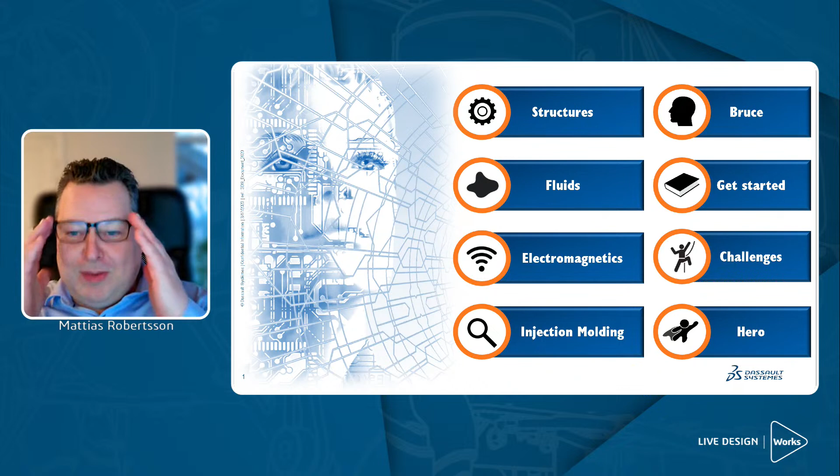Yeah, I mean, we have a lot of things we can discover and explore, but also, as you said, we really want to have some input from you guys in the chat. If there's any topic or engineering challenge you want us to address, we can explore that a bit more. So I'm prepared to talk about anything, basically, as long as my knowledge is there. As I said, I'm not a simulation specialist, but I'll see what I can do. My strength is probably structures and fluids.

Hey man, those animations that we see on LinkedIn say otherwise. Yeah, but that history is kind of being, and still is, my learning experience. I get really excited about some feature, I think, oh, this is really cool, and I just pop it out.

And it's not so much thought behind it. I think I get more concerned about how it looks and how to set up the video now. But in the beginning, it was just a cool feature, and then put it out there, and it got more exposed, and I was like, okay, I need to shape up the look for things.

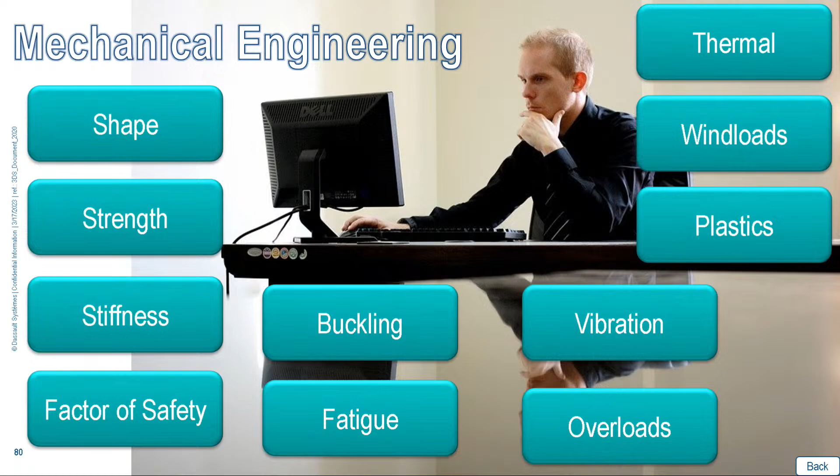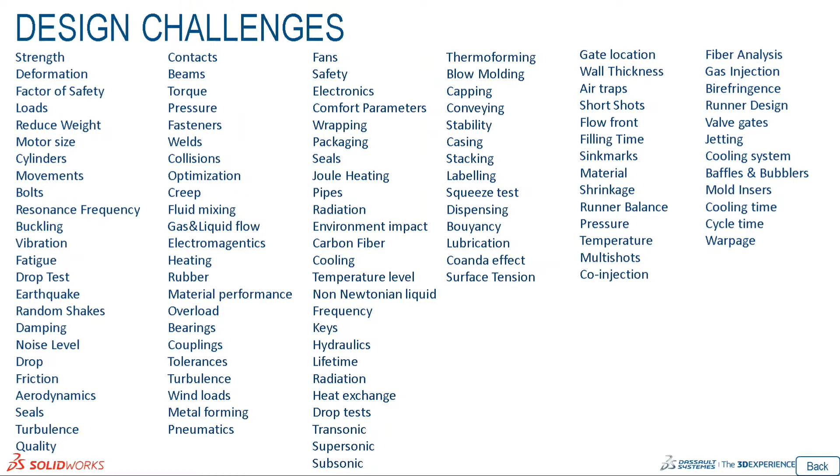Yeah, so there's a lot of challenges you can run into as an engineer, not just mechanical engineer. I think most of our SOLIDWORKS customers are in mechanical engineering in some way, and everything that comes close to mechanical engineering - it could be thermal, wind loads, fluids, vibration, anything. So just to emphasize how many engineering challenges we have that we can address with simulation, it's great. And I would say in the last 2-3 years we have more simulation products that can address even more challenges that we haven't been able to do before.

Right, and from what I'm looking at, Mattias, the design challenges are spread across the board. There are quite a lot of challenges that we run into when working on the product development process. I see some of these that I personally have run into quite a lot. So thanks for sharing.

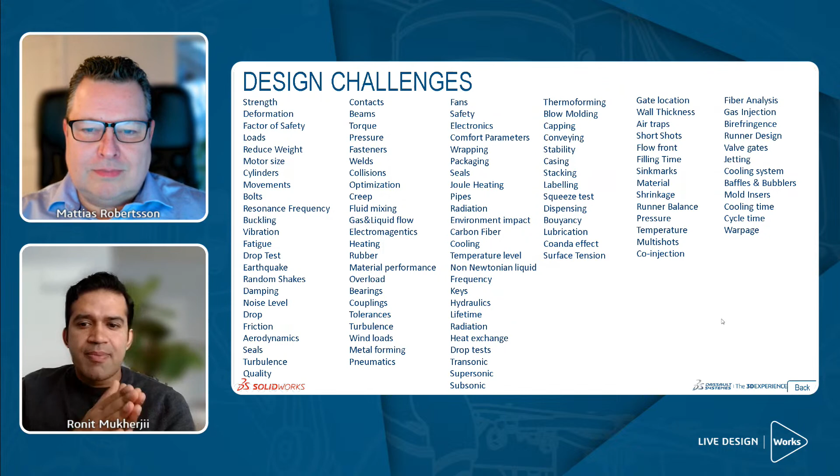And so let me ask you this. We've got design challenges, everyone has those. So where does simulation fit into these challenges? What's the value that simulation brings to our users and engineers and product development people? Yeah, I think that's a really good question, and it's often a question I ask companies - what really puts ourselves on, as the companies and the user side, what challenges you have and what drives your product development.

Not going into specific detail, but there's a lot of drivers where simulation is a key tool to use if you want to increase performance or make things stronger. If there's noise reduction needed, use the material in a correct way, or new innovative ideas, make things lighter, improve the quality. Are there any safety concerns? Is there any risk involved? Price and cost are always a driver. Even if you say we don't have any innovation or new products in line, what about your existing product? Can we lower the cost? What's the price of that? Can we look at alternative materials or manufacturing methods?

Sustainability is a big driver now in the simulation area, or I would say use simulation to address that. Right, it's always time to market. Yeah, right, sorry for interrupting. Especially with the whole world trying to go green, this new green initiative, that eco-friendly sustainability aspect from product development is incredibly important. So thank you for bringing that up.

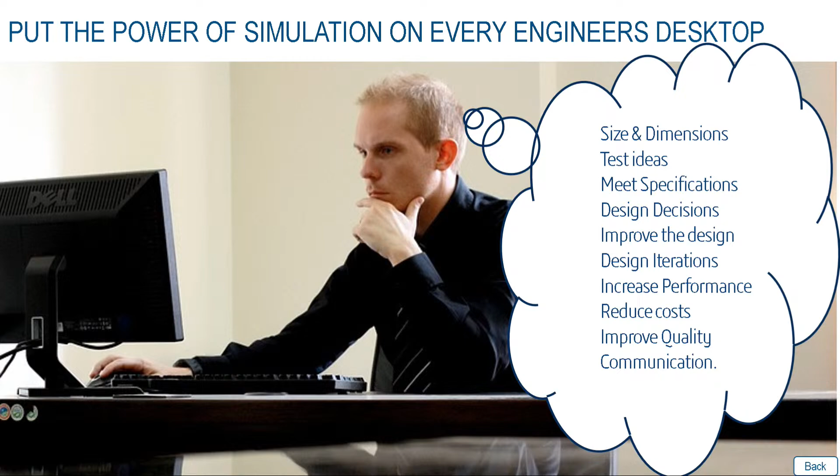Oh, that's fantastic. You bring up a lot of good points, and I have a question sticking in my mind. This tool, simulation - who should be using it? Should this be an early designer, a PhD level mechanical engineer, a master's level mechanical engineer, or your engineering manager? Who should be working with simulation at what stage of the design?

Yeah, that's a good point. We often see that it could be from the concept phase, when you try new ideas and be really creative, and I think everybody can use it. It's not complex, but the fear of simulation is doing something wrong.

Can you trust that you've done something right, and can you trust the results? So training is always important to get, and do that from a reseller. It's a constant process to tweak your design, set it up correctly, and to trust it.

So use it for concept design, and also for regular mechanical design when you're sizing and dimensioning, to see the result that you're doing the right thing. It kind of supports your gut feeling - as a mechanical engineer, I know if I make something thicker it will be stronger, stiffer, but how much? Where's the weakest point? So it's a guidance tool for product development in general.

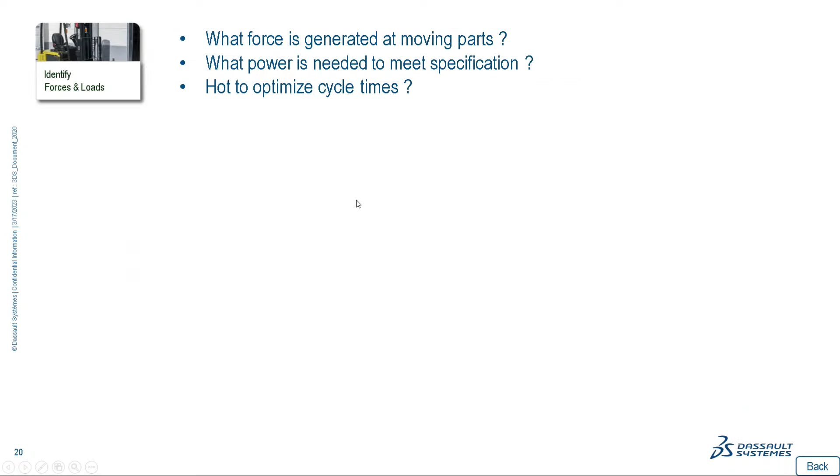Brilliant. So not talking about specific products, but in general, how we can use simulation to help us design products. Maybe if you want to identify forces and loads that occur in your design, we can use rigid body motion to help us understand and meet specification. What size of motor or cylinder do I need? How much force is needed if I need to do the lift in 1 second? So I get a quite good starting point of how I can use the values for my further design, or also test components - if I test this motor with this power, what is the effect? Do I meet my specification on that?

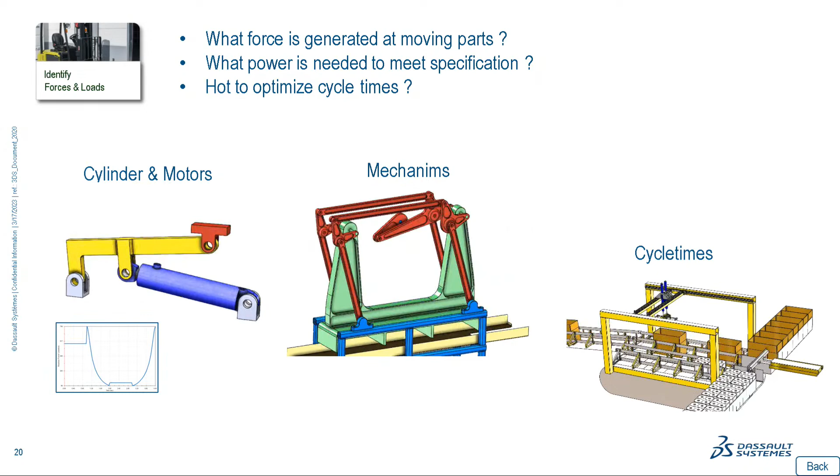So anything that moves in a mechanism generates forces, and those forces we need to take care of. We need to think about, is this good enough for my factor of safety? Maybe I have some fatigue problems at the end. So just to be aware of what is happening in my design and then optimize cycle times and so on. That's a little bit of rigid body motion there.

That's great. As soon as you've got some movement happening in your designs, you've got some dynamic loadings happening, and of course the forces and stresses that are produced with that, we want to know if your design is going to be working or not. So no, this is fantastic.

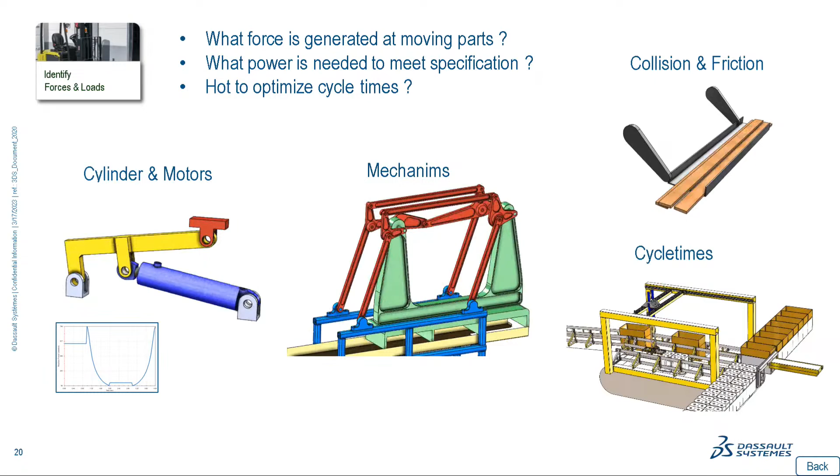So the moving parts and forces that are generated, that's a second leg of the simulation - sure, you can run your first study in a static scenario and see if things are working, but you don't know if it's going to be working on a dynamic side, correct? Yeah, and also I think this is the starting point of simulation, where you have created your 3D model in SolidWorks or some other program, but simulation brings it to life.

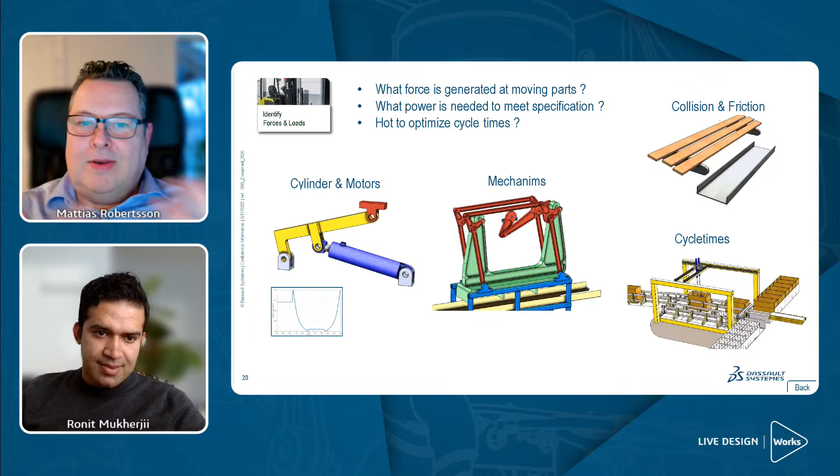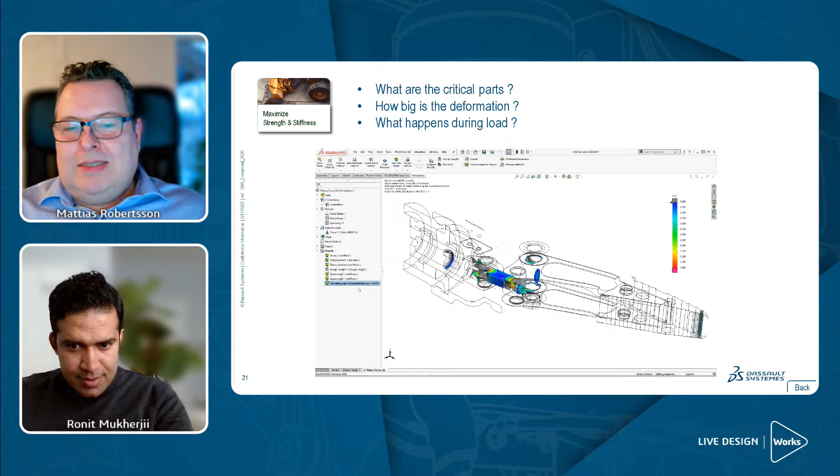Now we can add physics and really see what's happening, things starting to move, and generate the forces. But what happens inside the design if we want to look at stress levels, deformations, and so on? This is really the beauty of simulation, to go into your design and see what's happening.

How strong is it? Maybe we don't have strength as a parameter, but stiffness, and this really helps our gut feeling of what's happening here with the design.

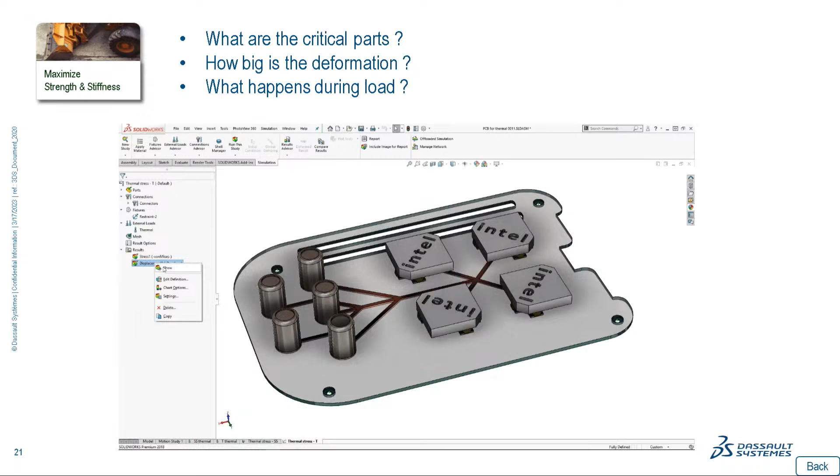So it's really adding the physics, but also thermal. If we have temperature changes, things start to move, and that could also be a factor we need to consider. There could be quite high forces on thermal loads as well there. So we can bring thermal loads.

You can run a thermal study in simulation and bring those thermal loads into our static study to understand how those thermal loads affect the design.

So for thermal loads, the physics are convection, conduction, and radiation, and often thermal is a fluid problem, because often we have gas or air that we cool or heat with, or some other liquid. So we have two different products for thermal loads, but I would actually recommend flow simulation for thermal loads. With flow simulation, we can capture the fluid movement if we have air or a gas or a fan that is cooling.

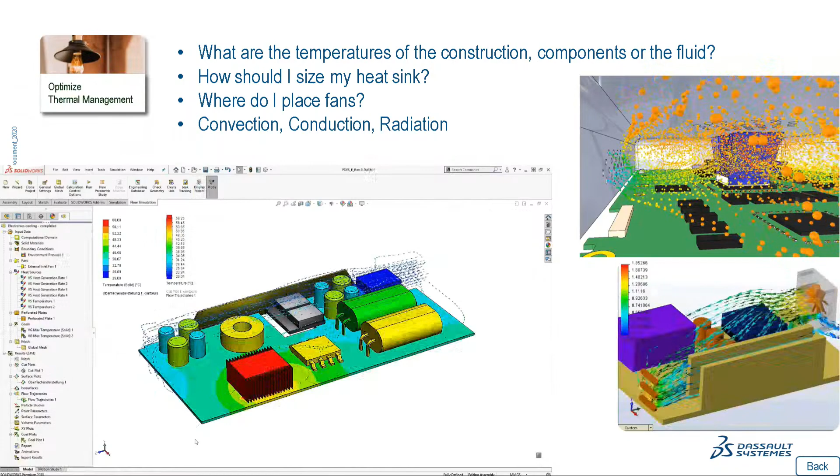So the output of this could be an input for structure. We kind of do this as a two-stage rocket. First, we do the thermal study to figure out what temperature we're going to end up with, and then we do a static study to see how this is deforming.

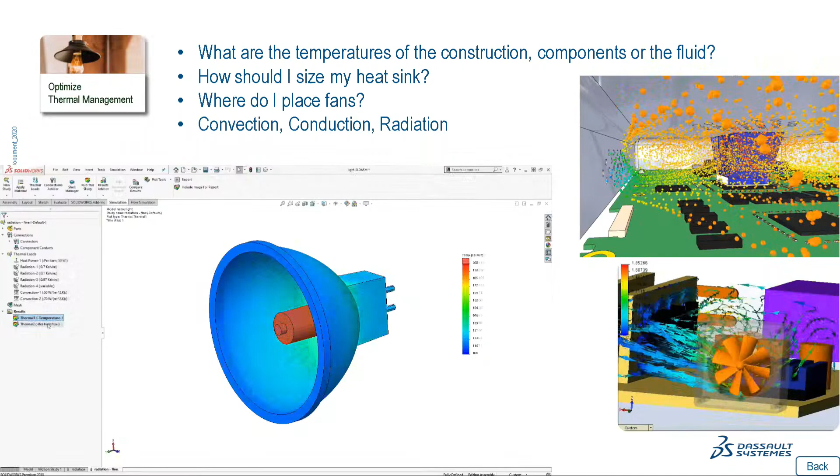That's brilliant. Of course, the effects of your thermal loads will affect the design itself, and of course, when things heat up, things melt. So we want to address those scenarios.

So this is fantastic. You mentioned that for these types of problems, for thermal studies, you would rather use the CFD rather than the thermal study provided in SOLIDWORKS simulation?

It depends on the application. I would say 95% of the time I will probably use flow simulation just to get more accuracy and easier setup. We can do thermal studies with conduction, convection, radiation with Simulation Pro and above, but flow is easier to set up and you get better results.

And also the air movement, the fluid movement is recognized here, because it could be the fluid that carries the energy, and it will influence the final outcome there also.

Right, and as I can see with the animation, it looks fantastically cool. I need to learn how to set that up.

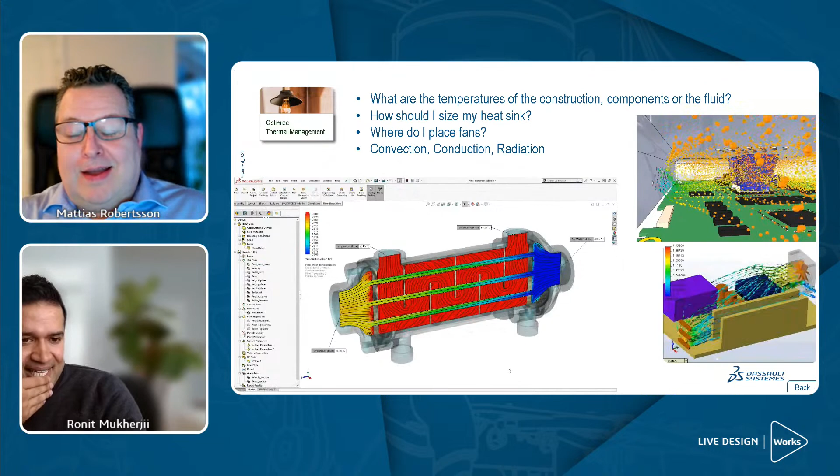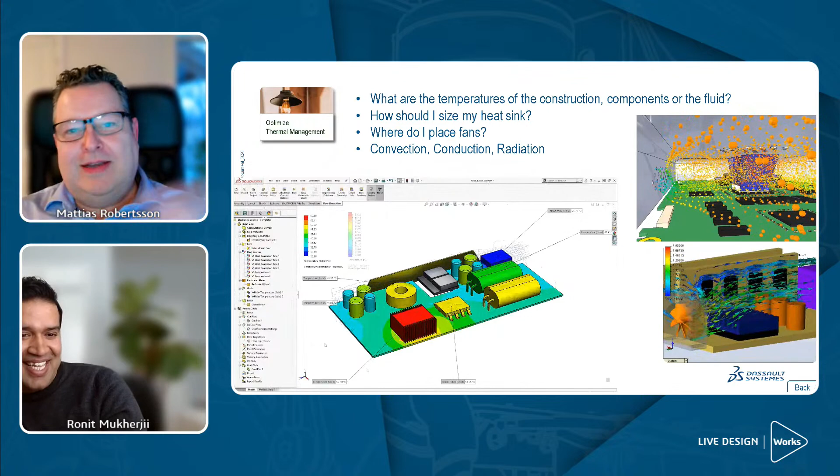And that's also what I want to highlight, that you can actually step inside your model. You can shrink yourself to 1 millimeter and really experience your design from inside and out. How much wouldn't you pay to shrink yourself like an Ant-Man and go inside your design to experience and see what it is, and then really see what's going on there.

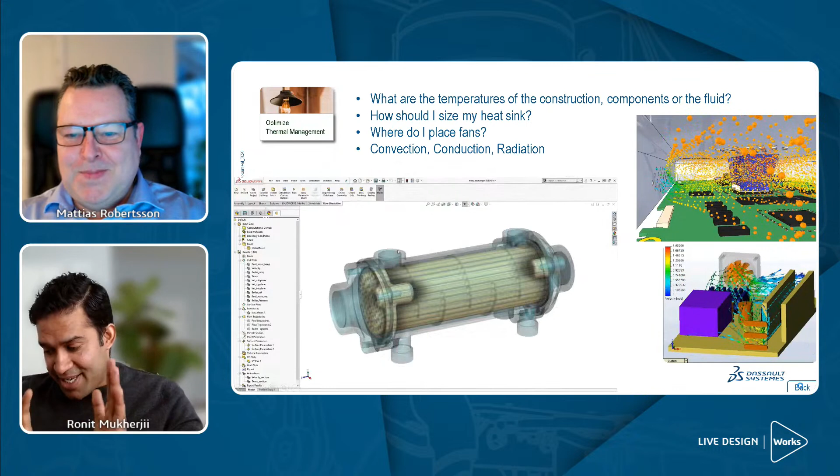You know, the first Xbox Microsoft did, they had to recall it. They called it the button of death or something, it turned red, and they had to recall and modify it. It cost them like $1 billion, because they had a thermal issue, it was not cool enough, and the electronics broke down for that. So temperature is a concern. They did not run simulation, I'm just kidding. But yes, somebody cheated in the development, and yes, that red light of death. I'm familiar with that, light of death, just because all my friends that had Xboxes dealt with it. I am a PlayStation guy, so...

We're cool. Oh no, this is fantastic. Thank you for showing us what structures stands for, what that role and that application stands for, what fluids are.

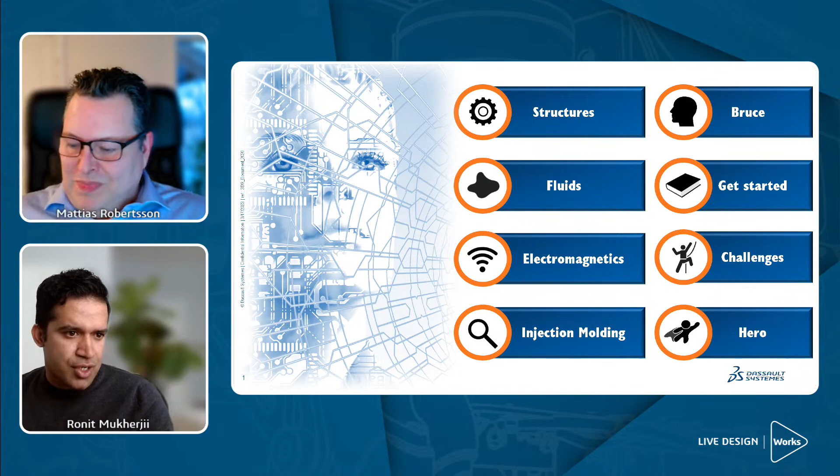Let's, I know we haven't touched on injection molding yet. Can you touch a little bit on injection molding, kind of tell us a little bit about it? Yeah, absolutely, so injection molding is quite interesting.

When I learn more and more about plastic, the more interested I became, because the decisions we make as a designer really influence how easy it is to be manufactured or not, regardless if you think it or not, because making a plastic tool, there are some things that we need to consider.

We cannot make things too thin, because then we can end up with short shots. We need to understand... sorry about that, technical issue.

So we need to make sure that it's okay to be manufactured. There could be problems with weld lines, where the flow meets, and that could cause visible problems and also weaknesses. There could be air traps, and these things are impossible to predict unless you have really good experience from other failures and successes, how to meet those.

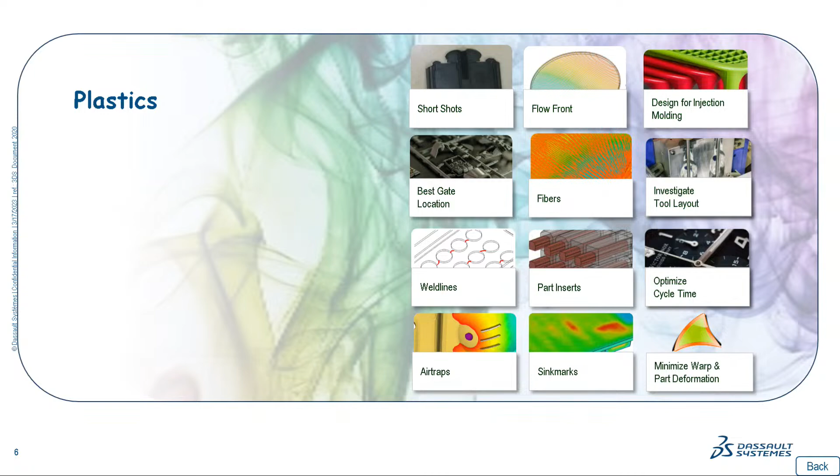So what I'm seeing on your screen, Mattias, I see, like you say, weld lines, air traps, sink marks, and short shots. These are just issues we see on plastic products. If we don't have 30 years of experience in plastic products, and gone through 30 years of failures trying to understand how this works, we can overcome that with the simulation tool that we have, and at least know where these issues are going to happen.

So we can, for example, change our gate location, and that will change where the weld lines are created, where the air traps show up. This is fantastic. And there was another point you brought up, that rework on molds is costly and lengthy.

So when you think about it, another point you brought up is the thickness of materials, the plastic materials and stuff. When you have to do rework on a mold, either you're removing material from the mold, or sometimes you have to add material to the mold. So those things can be tremendous.

And I think you bring something up that I wanted to mention, the thickness. The trend in the plastic industry, or parts in general, is that they get thinner and thinner. As a mold maker, you have guidelines not to go thinner than a certain thickness for a given material, but we're kind of pushing that limit. Looking at the shells on mobile telephones, they are super thin, and we need to make sure you can do that part, because doing a thin plastic part, that's the challenge.

But that also comes with the sustainability aspect, that you want to make things thinner, you want to use less material. So how far do you want to push that with your experience? Well, now we can simulate that and make sure it's working.

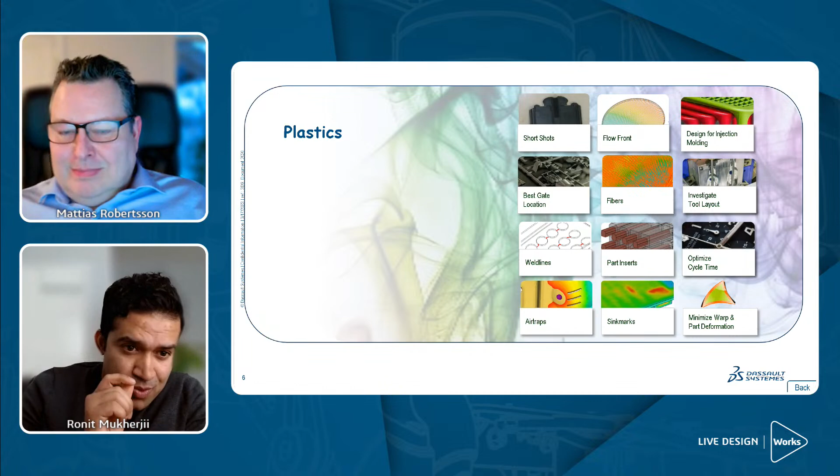That's a great point. And that actually leads to another question we have in our chat, and it's a fantastic question from the point you just brought up, how far we can go with this. So the question Maurice has is, how about our future expectations?

Will we be seeing AI influence in simulation, or have you seen something so far? What do you have to say to our viewer Maurice?

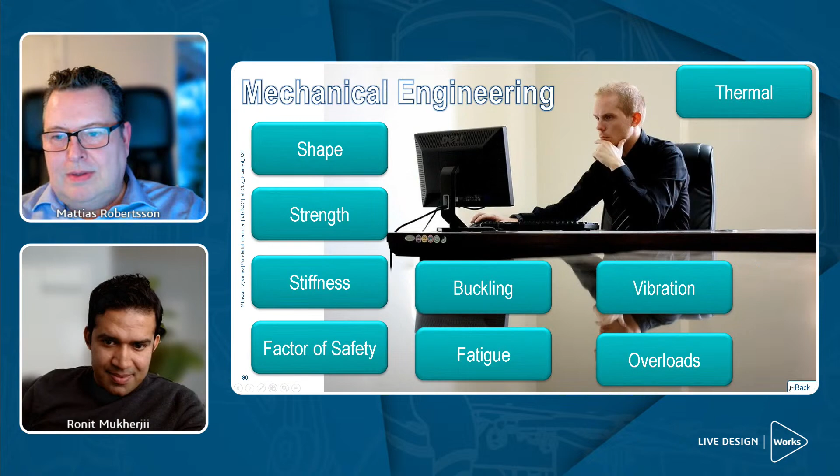Yeah, that's a good point. Let me find my slide about that. There we go. I think that's really interesting about the history and future of simulation, because in the past, if you go back 20, 30 years, it was so hard to use, complex, expensive, and targeted for specialists.

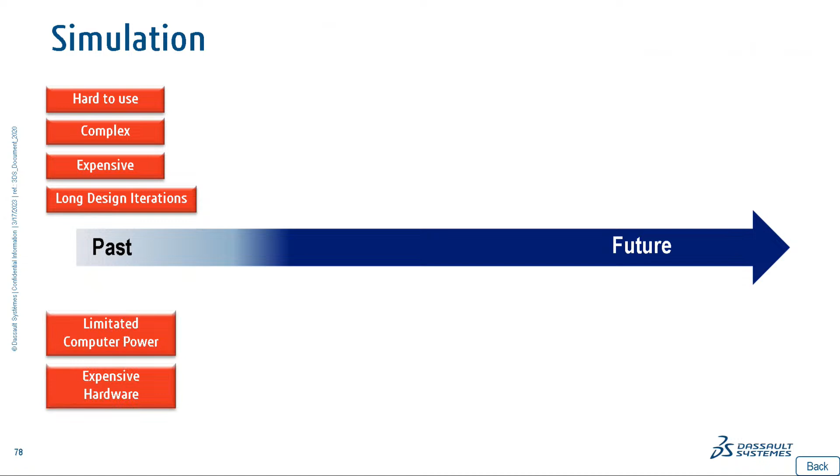And the hardware was expensive. I think today we've gone a long journey with simulation, where it's powerful, easy to use, fast. We have integration in SOLIDWORKS, and it's really cost effective in product development. Today we have access to cloud computing, a lot of cores included with the license, and we have GPU computing.

What's going to happen in the future? Well, I think we'll get more AI and machine learning. We can also see that, and they will probably take a long time in certain issues, but we can do certification with simulation results, so we don't need to go to the lab, make a physical test, and break it to get certified.

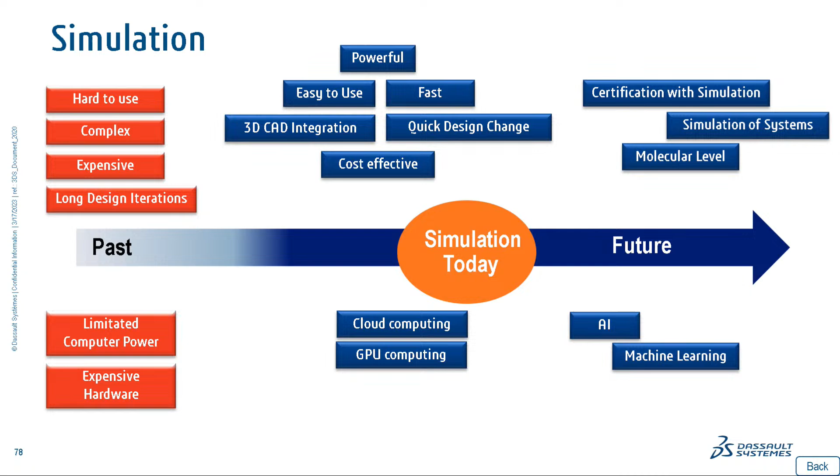If the industries accept more and more simulation, that's a fantastic point. Yeah, and I think some parts in the aerospace industry, you can get certified by showing simulation results. I'm not familiar with that, but I heard it's coming.

So I think that's also interesting in the future, that we can accept more virtual tests and trusted results, and also do even finer simulation. We'll probably have more computing power in the future, get even faster results, and also do simulation on a granular, maybe molecular level, getting even more details. It's going to be bigger problems, but we can do it even finer, I think.

I was just about to mention, getting into the molecular level is going to open another set of problems which we'll address and get there. But no, this is a fantastic roadmap you're showing, and you've kind of nailed it.

Like in the past, it was extremely hard to use, and I still remember my uncle who was an engineer, he used to do hand calculations and stuff, and I was like, hey man, what are you working on? And he's like, oh, this is what we do and all that stuff. And of course I was like, I don't want to do this. But things have come a long way. As of today, like you mentioned, much easier to use, lots of power.

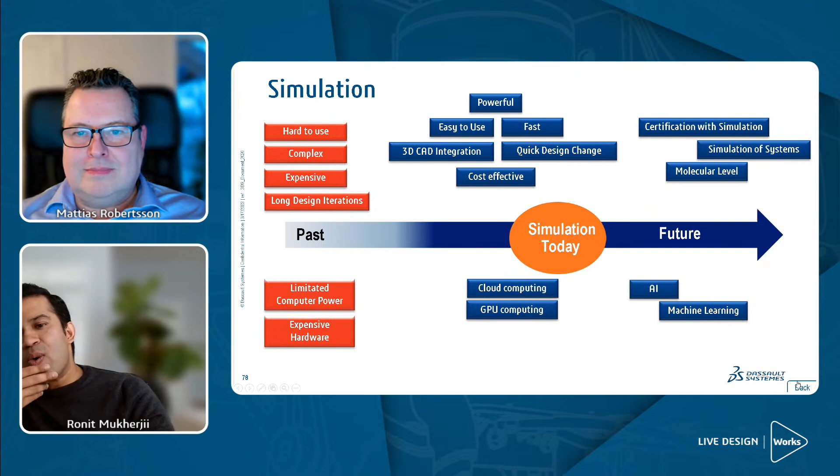Yeah, Mattias, I know that I am super excited for this. So I know you have some cool videos and animations to show us, and of course introduce the superhero Bruce.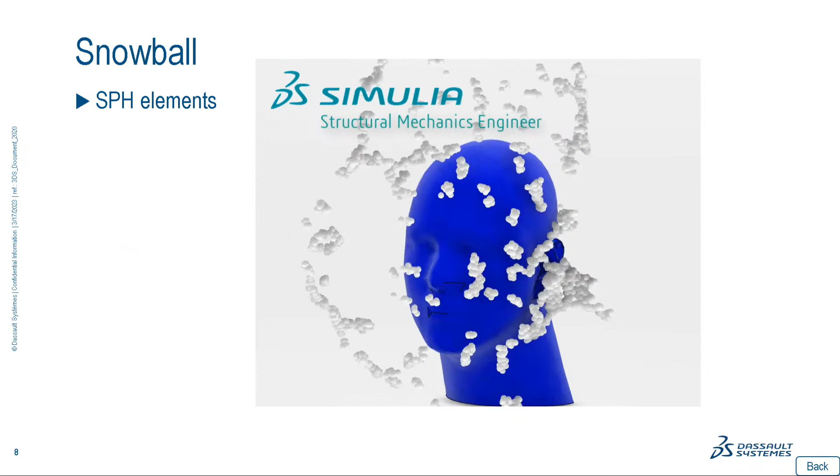So one of my first videos was with the SPH elements. That's something we have in our structural mechanics engineer role. It's kind of liquid, and it has some forces between those particles. These are quite big particles, you can see this kind of a snowball. I thought, let's move this to a test dummy and make him blue. I like blue man group, so I wanted to incorporate the blue stuff there.

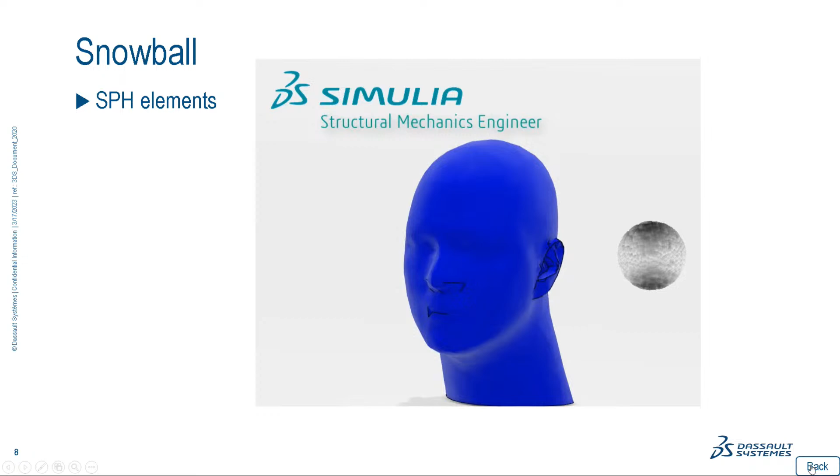So I can show you a little bit so that's where Bruce came from. Okay. Yes. All right. That's good to know.

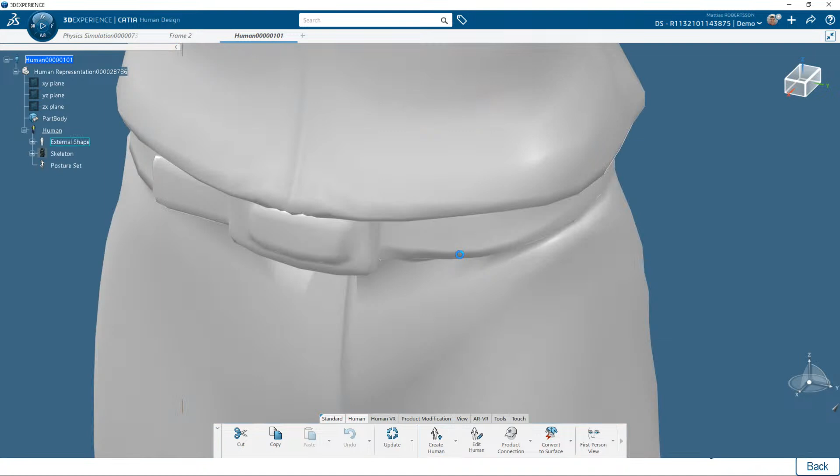So I can show you how Bruce is created. Now I have just the face of Bruce, but Bruce is created from something called Visual Experience Designer. And there's something called the human design here. So here we have a lot of different characters, man, female, and I picked this guy as Bruce. So it is very, very detailed what you can do.

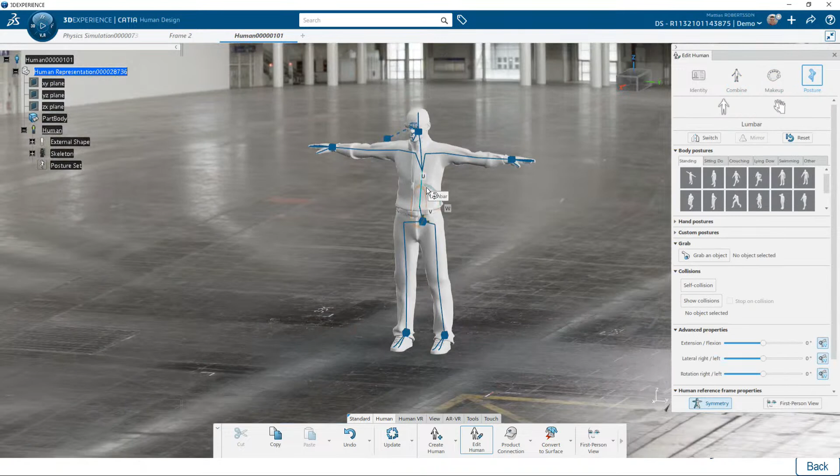I want to share my kind of nice indoor there. And if you want to change the posture, it is fully doable to change the posture there. Oh, that's awesome. Yeah, I want to show that it's photorealistic at the same time.

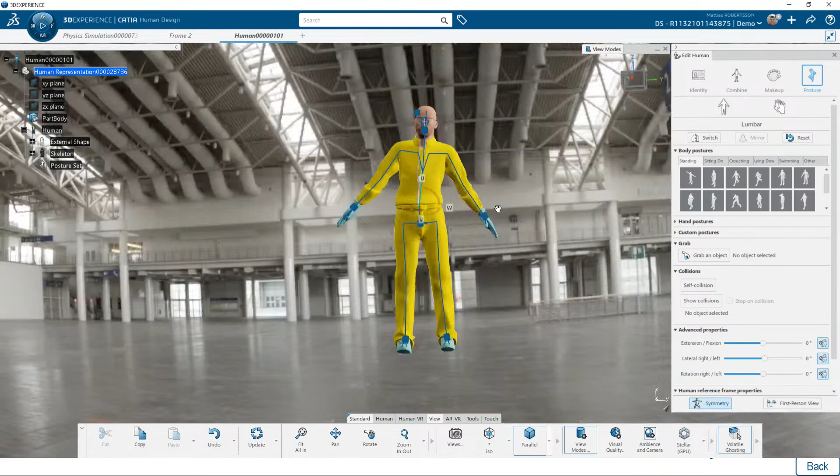So let's add the colors here. So here we go. You can really change the position and do some workout here at the same time. And it's also super detailed. I mean, it's even the mouth you can open. You can see its teeth and its tongue, and all kind of stuff there.

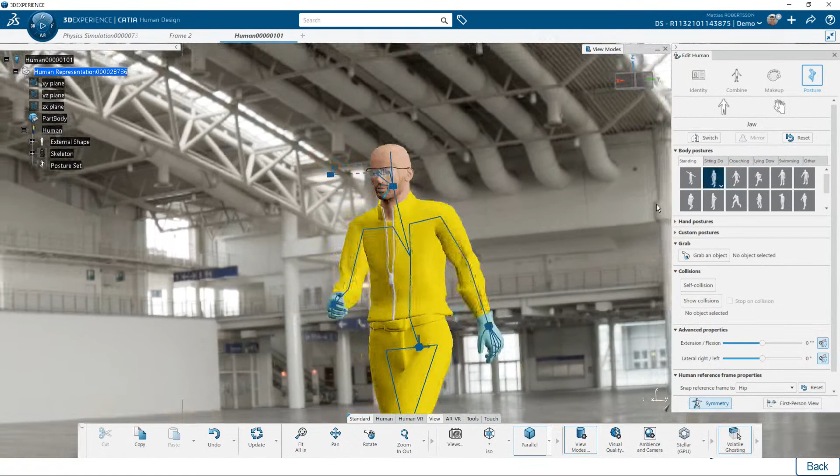So for simulation, I reduce this. I export Bruce and delete this. You can change clothes, and there are some predefined positions that you can do, but you can do your own stuff there. So I cannot use this directly on simulation. So I export it to SOLIDWORKS, and then I modify it so it can be used there.

Oh, that's a fantastic way to create a virtual test dummy. And now let's see what we've put Bruce through. Thank you for introducing Bruce to us. But let's see what Bruce has gone through over the years with Matthias.

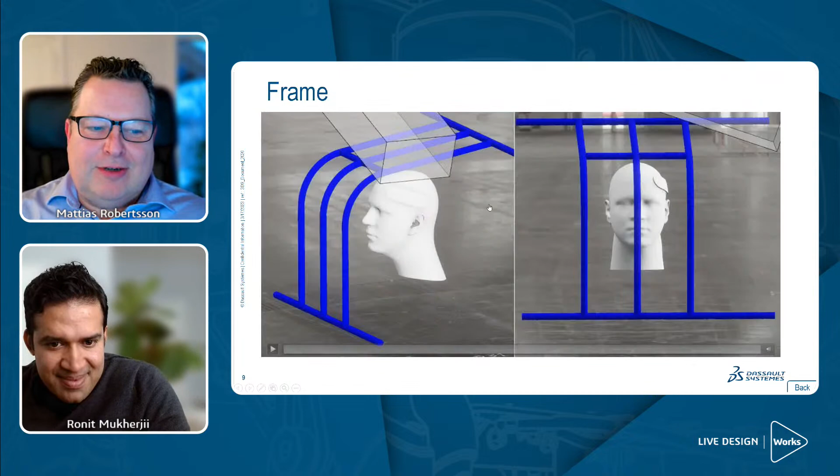That's what I'm excited about. So this is kind of my, I'm adding up more and more features, more capabilities here. One of my first simulations was doing drop tests with a frame, and Bruce, I didn't have the color on, I didn't know how to use it, and it's kind of hitting the face. But doing drop tests is so easy, just to set this up and run it. And there's a lot of industries that need to do this kind of test. It's kind of a falling object protective structure.

So there are certifications and standards you need to follow to do protective bars and so on top of that. That's tons of applications I can already think about, like when it comes to dropping things and making sure things work. So when it comes to that frame, what type of results are you expecting to get out of those? Are we looking for displacement and stress results in those bars?

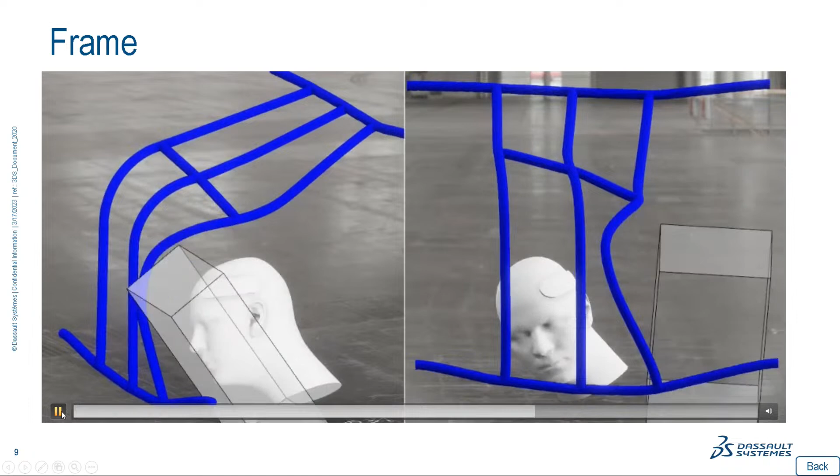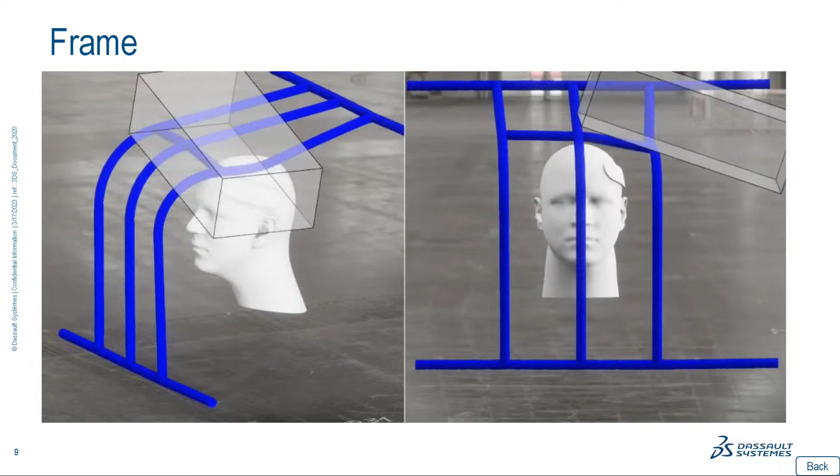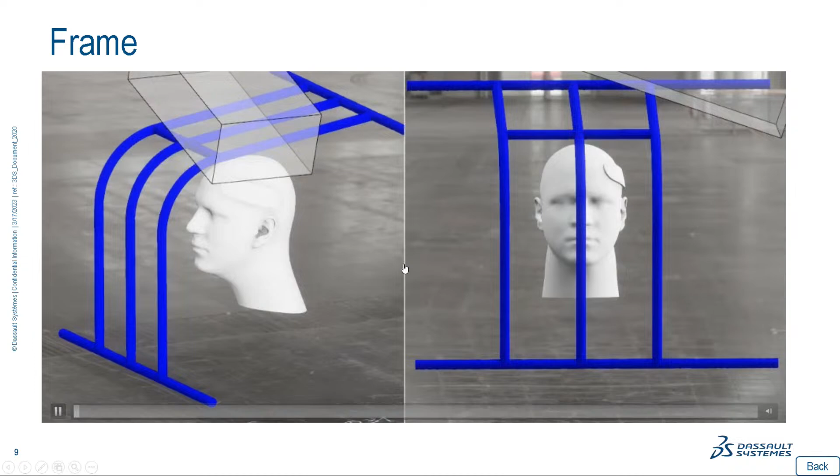Yeah, and also the final displacement, can it withstand the load, the impact, the energy that comes, and that's the kind of certification. You need to have a 5 kilo dropping at the speed of, I don't know, X amount of meters per second, and it should withstand. It should not buckle in and it should not collapse. So it's kind of a good tool to verify that your design is withstanding, and also make it stronger so it can withstand overloads and so on. So just for safety reasons there.

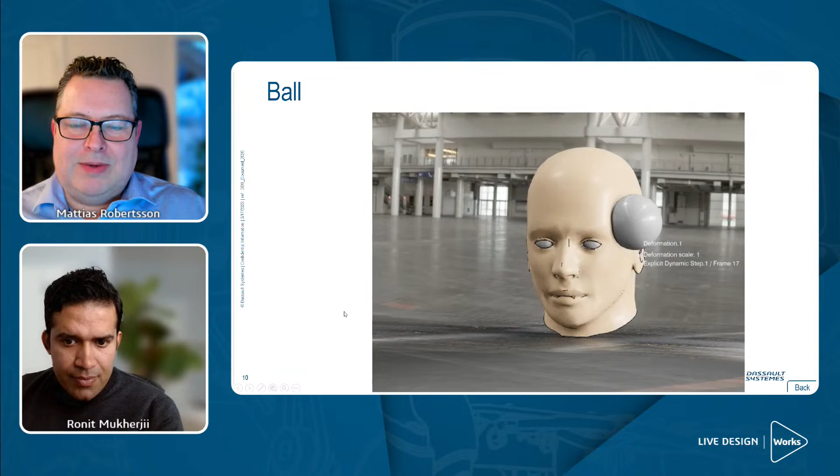Yeah, and also not to drop the block on a real person wearing a helmet to test physically, because that would not be good if the bars don't stand like they're supposed to. So that's awesome. So then I learned a little bit more, and I really like the virtual environment where you can have this kind of testing ground, and now Bruce got a little bit more detail. It got eyes and some skin colors, and I did quite a bit more job with this helmet design.

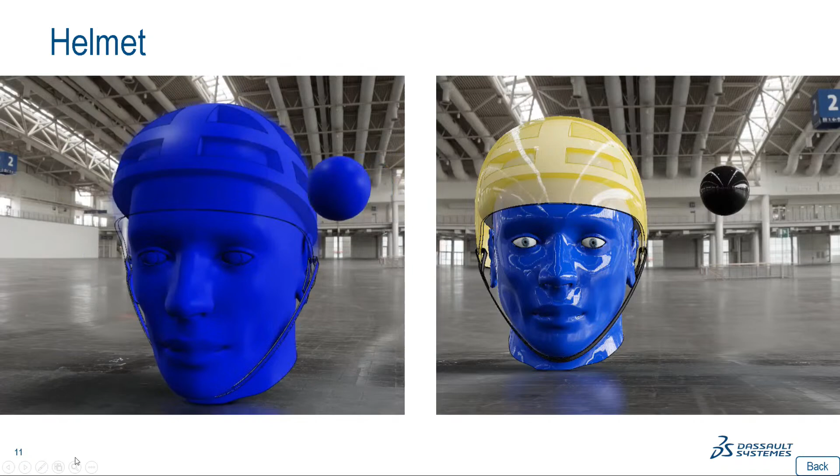This is great. Yes. To see the impact of a helmet, and doing helmets, you do different materials, maybe some foam. So it could be quite complex material definitions, but with the powerful Abaqus solver and the material setup that is very, very detailed, we can really solve this. And it's an impact, it's kind of a very dynamic, rapid simulation here.

Right. And just to kind of think about the applications of this again, I see all these cool simulations, Mattias, and I'm only thinking about what applications we can use. And of course, everyone has been hearing about...

I love sports. I love playing sports. I love watching sports, and I love watching NFL as well, but not as much as English Premier League. Go Manchester United. Yes. But yes, all these contact sports where athletes are wearing helmets and stuff, and that helmet technology has come a long way.

And it still has a long way to go. Everything is going to keep getting optimized.

So do you think these engineering companies coming up with top level technology are using tools like what we're seeing on screen right now? Yes and no. I think a lot still rely on physical prototypes and experiment with materials and testing, and do some clever designs. For helmets and protection, it's constant development and improvement in this area. But damping and material models need to be quite detailed, and I think we have really good tools to do that. There's a lot of simulation that could be used more in those companies for sure.

Mattias, I've got one question for you. Our viewer Sean has a question. In that animation you showed us regarding the snowball, are you defining any specific contact conditions between those individual particles? How do you set that up?

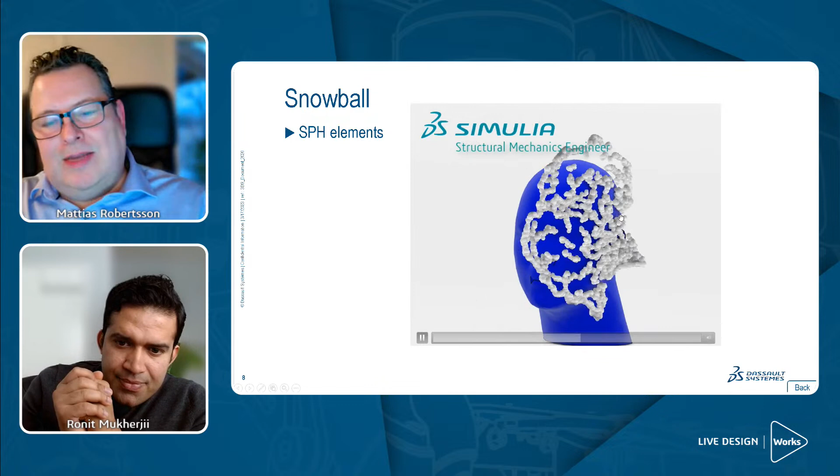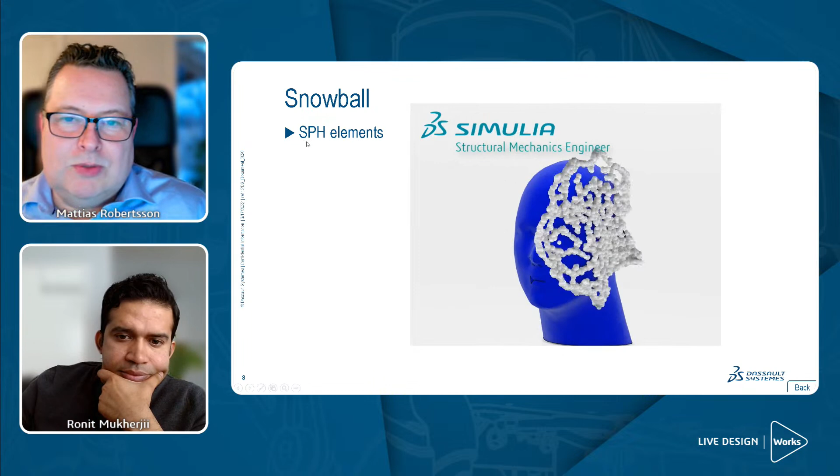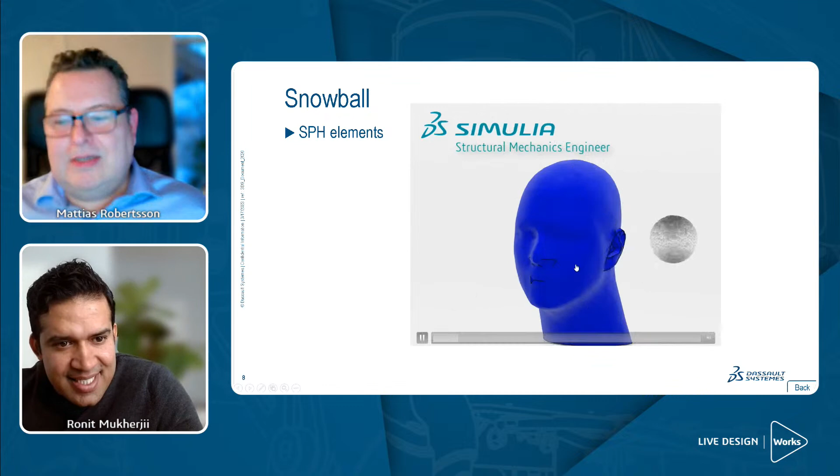It's quite easy, it's kind of viscosity and density, that's it. So it's using those settings. Also the size of the particle is something very big here, so it's not behaving like a fluid, it's more like a snowball in this effect. But it's just two settings to get this. The trick is to use the element type, SPH, smoothed particle hydrodynamics - it's a mouthful to say. That's bringing fluid into the structures. Otherwise we use shell, beam, or solid elements. Got it, got it. Hopefully that's your question, Sean.

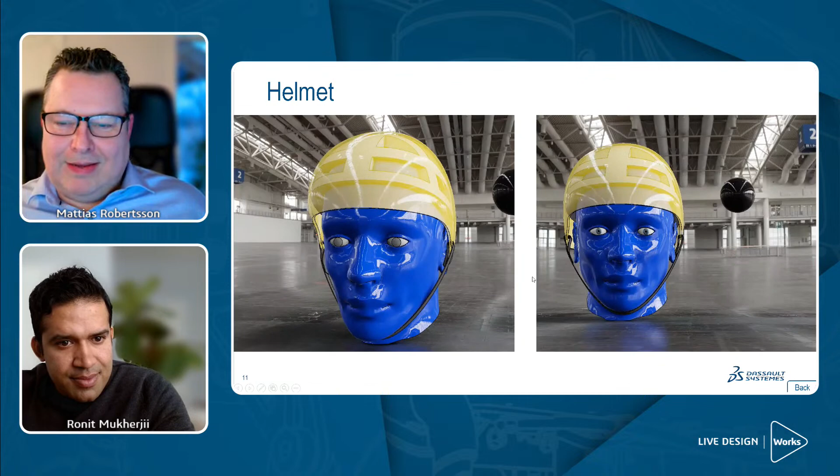Just to wrap up a little on the helmet - I have a lot of videos with bloopers, maybe I should do a blooper reel at the end of the year. Here's a video where I tried with some eyes, you can see it's kind of rolling. I was trying to map the iris on top of the globe but I don't think we support it, I think I need to put it on a part or something, that's why it goes like that. And to be honest, in reality that's what's going to happen too - if I get smacked with a big ball in my head, my eyes are going to go left and right. So maybe it's not too far off, pretty accurate if you ask me.

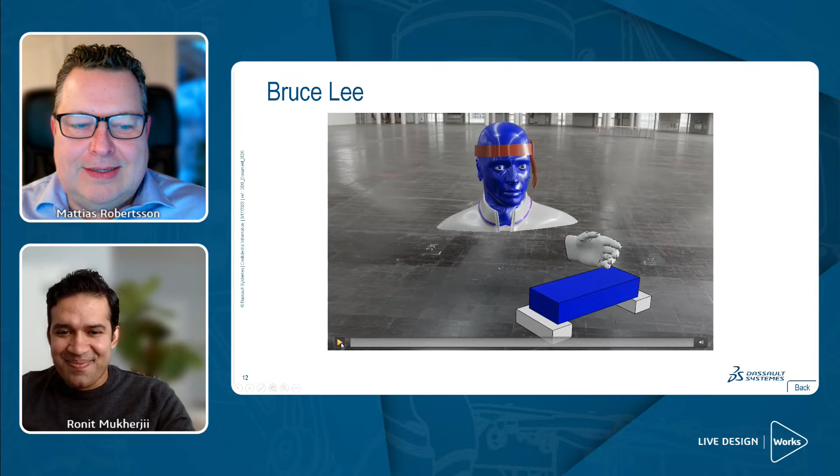All right, next, Bruce. So in SOLIDWORKS Simulation we cannot do failure or make things break apart, but with Abaqus and the structural mechanics engine, the material setup could include damage and failure.

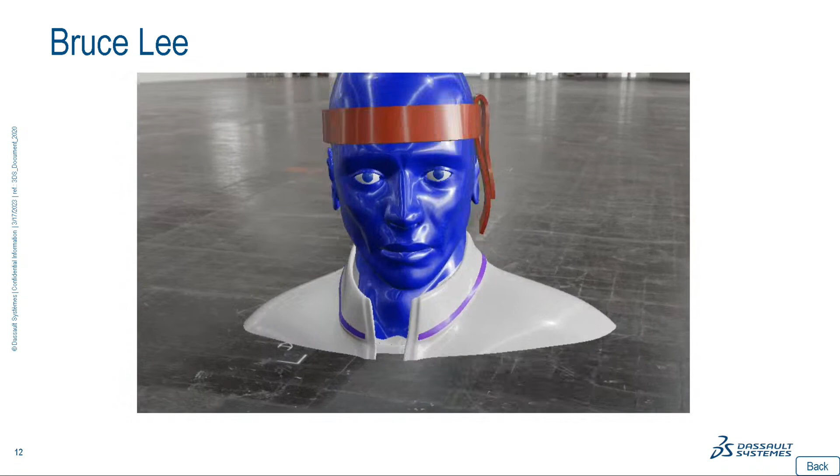So then I introduced Bruce Lee, that's his alter ego with the red bandana on, and then I got really excited - I mean, can we break things apart? Let's make a cooler video. This was kind of my first run at having some metal and some old setup.

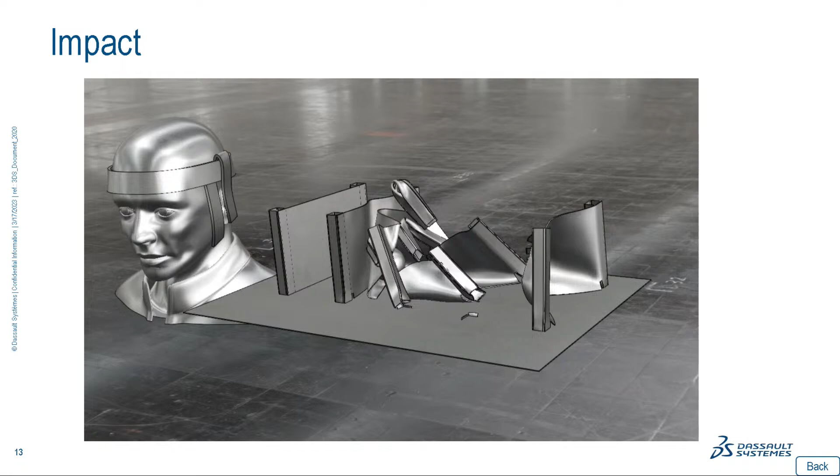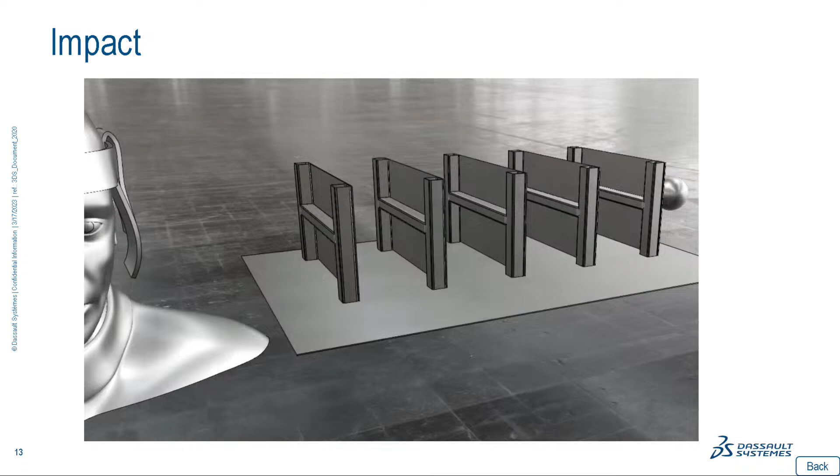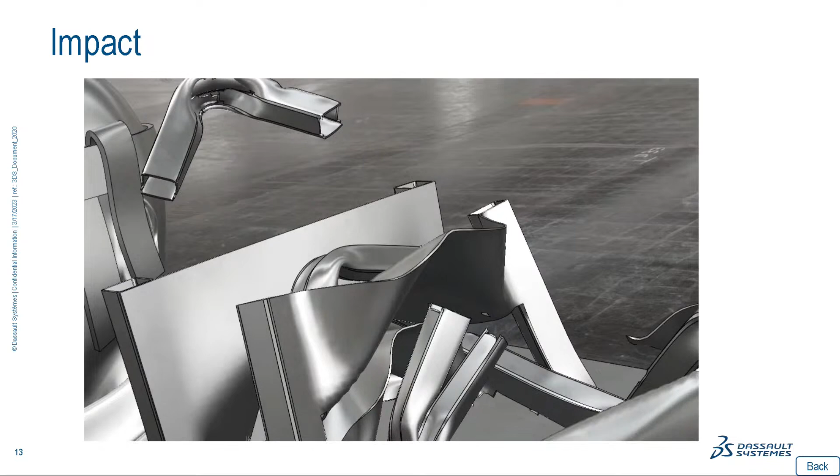So over here we're seeing a ball going through multiple sheet metal parts, seeing if it's going to reach Bruce or not. Yeah, and even a flying component I see. Yeah, it's breaking apart, and breaking apart can smack Bruce on the head. I didn't record the full length of it, but that will be the impact. The cool thing with the explicit solver I use here is you can slow things down and really see things in slow motion. That's something I often see missing in simulation videos - it's kind of 5-8 frames, it's choppy, not smooth. I think this is about 200 frames or something, so you can really slow things down a lot with the explicit solver, which is great.

Great, let's see - okay, it might not be. I'm not sure if the video was showing, but okay, let's look at the next one.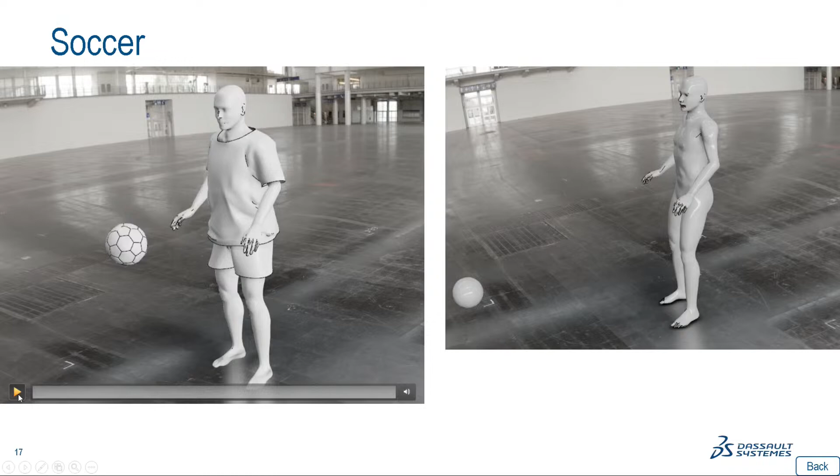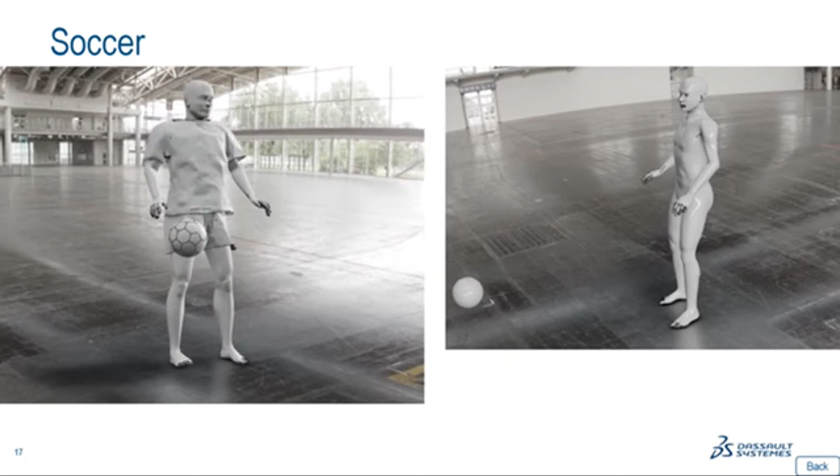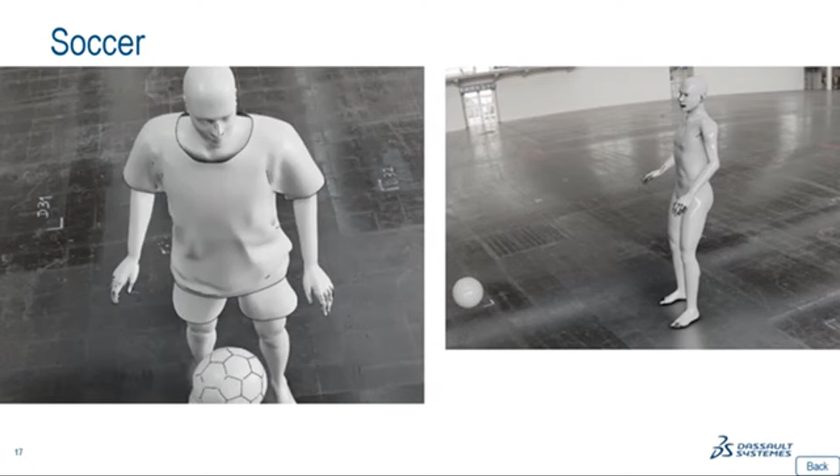Oh now this is my favorite Bruce version, the soccer one. Yes, I love football, like I said, glory. Manchester. So let's see what we got. This was for the World Championship. I can see there's no colors, there was a problem with that version so I didn't have any colors, so it's back on. Here we got Bruce hit in the stomach with a football, and the clothes I did myself because I exported Bruce as nude. I have another video here with Bruce with no clothes, at a good angle so we don't disturb anybody.

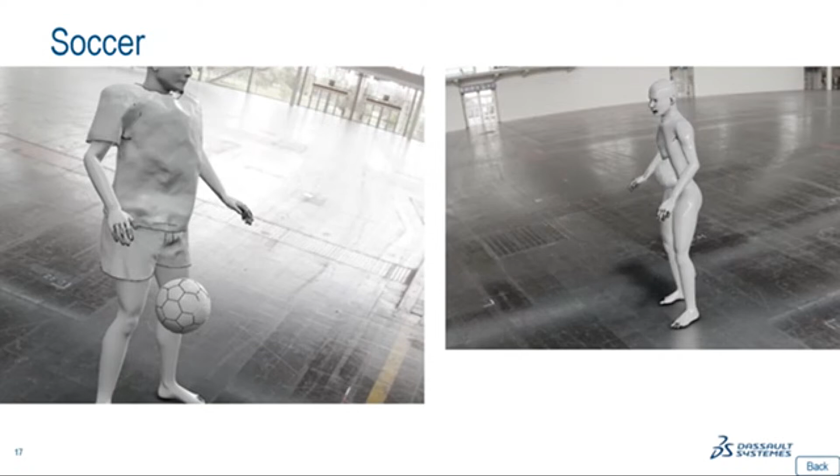There's nothing to show really, but I exported Bruce as nude, and then I designed the clothes on top of that. So we got a soccer player with that.

All I can think about watching this video is the final between France and Italy back in the day, and I just want Zidane, another Bruce in there. We can call him Zidane, and let's recreate that. I'd love to see that, but no.

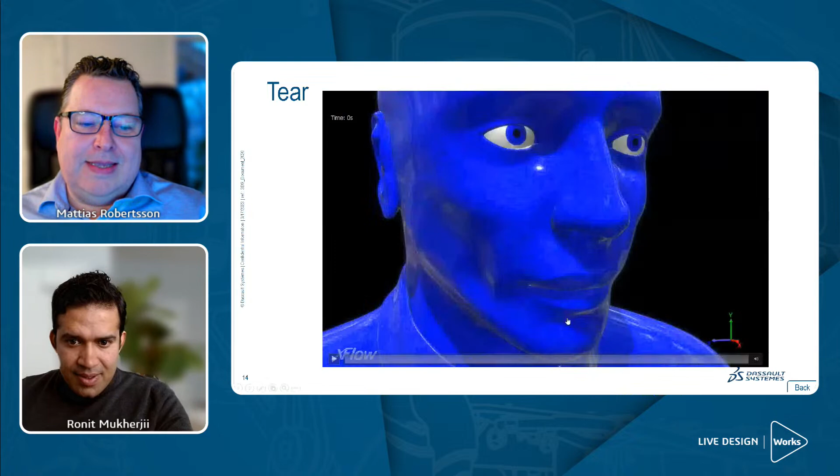Speaking about emotion, I did some work with XFlow also, interacting with Bruce. So he has emotion, and here he's crying a little bit, from joy I would say, not from pain. Joy of helping us - he takes all the stresses and all the loads and the forces upon it to give us a great product.

So thank you, Bruce, we appreciate your hard work. Yes, and more coming. Mattias, I'm very curious about the last slide you have over there as well. What are we looking at there? That seems very interesting to me.

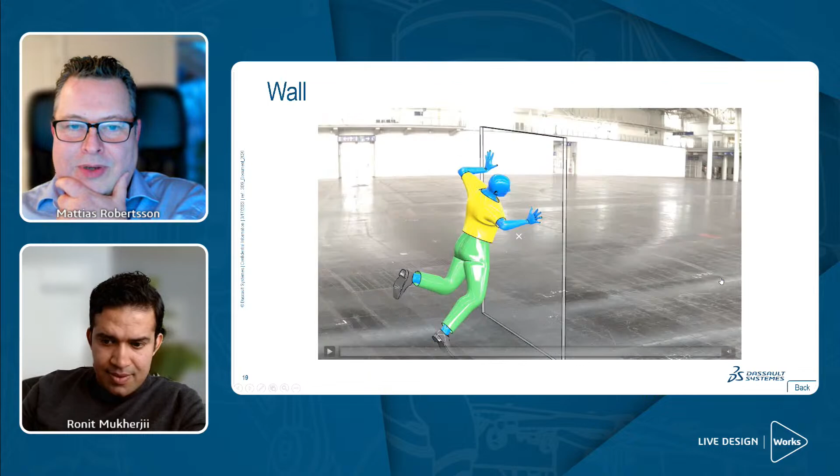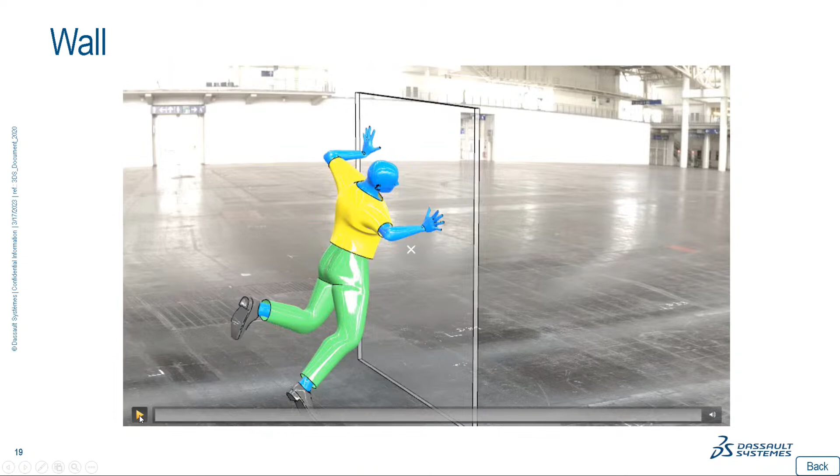Yeah, this is my latest, and I put a little bit more work into Bruce's version. So this is him in a new position, and the Bruce model here is a fully solid model. I removed his teeth and the mouth, what's interior there. So Bruce with the football was actually a shell model, a shell mesh - I used surfaces with thickness - but this is a full solid model. And I also put on some very nice new shoes, he's very proud of that, I should mention. So this is him hitting a rigid wall, and we see the reaction of that.

Now, the material is not human, of course. And then I changed the wall into a thin aluminum sheet metal part, and he's going through that and we see how it breaks.

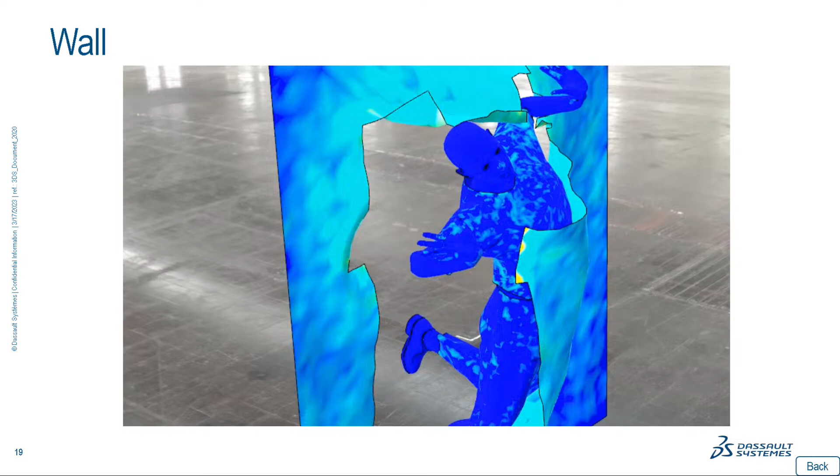I say, this is not what I do for my working hours, this is a little bit of my spare time. I do this for fun and to learn new stuff. So I can do Bruce videos all days, but that's not really my job. And I have a hard time showing off that to my girlfriend, saying, is that what you do for a living? I'm like, no.

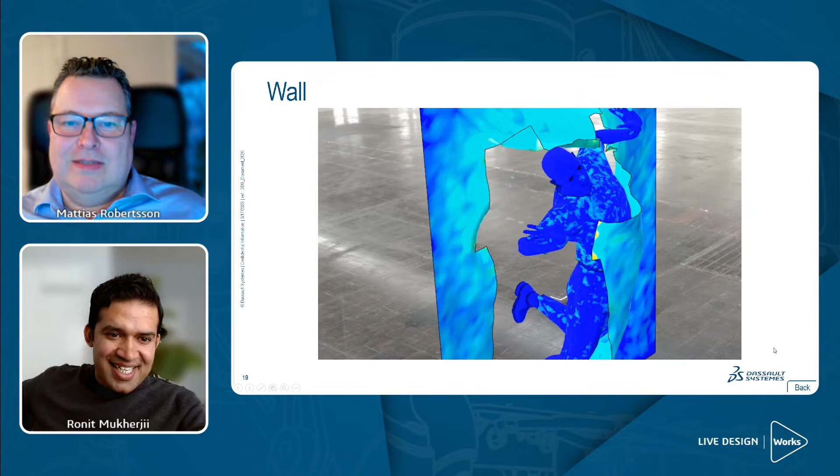I know that feeling, I know that feeling, Mattias. But as a fan, I am thankful for all the Bruce videos. When you put it out there, I am the first person to look at it. I'm like, yes, Bruce is back. So I get excited, and I'm extremely thankful for Bruce and your hard work, where you share the gospel of simulation with us and our viewers.

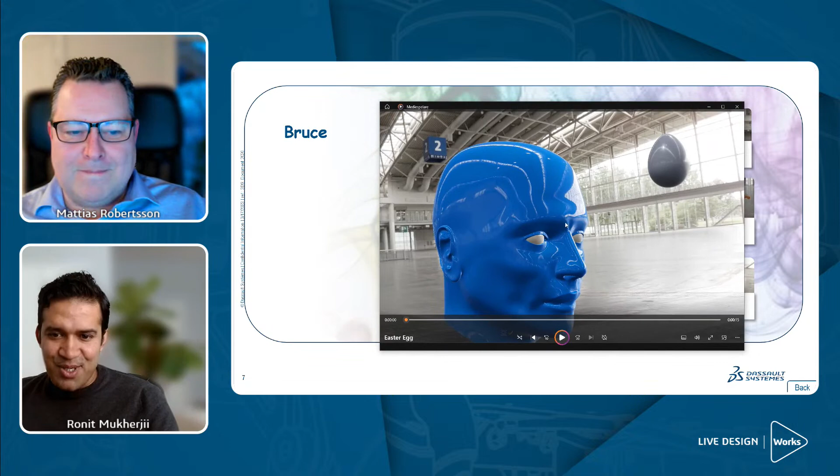Yeah, I just made a Bruce video today that is going to come out for Easter, but I can show you guys that. Of course, Easter is - you see my screen there with the egg? Absolutely. Yeah, so this is my new Bruce Easter theme.

Let's see how it goes. Oh, I need to play it. All right, this is live, no one has seen this, this is the first - no, this is a world premiere. We are lucky, I've got some SPH elements, and it's cracking also at the same time. All right, you can see this slurry. This is kind of the question about the effect.

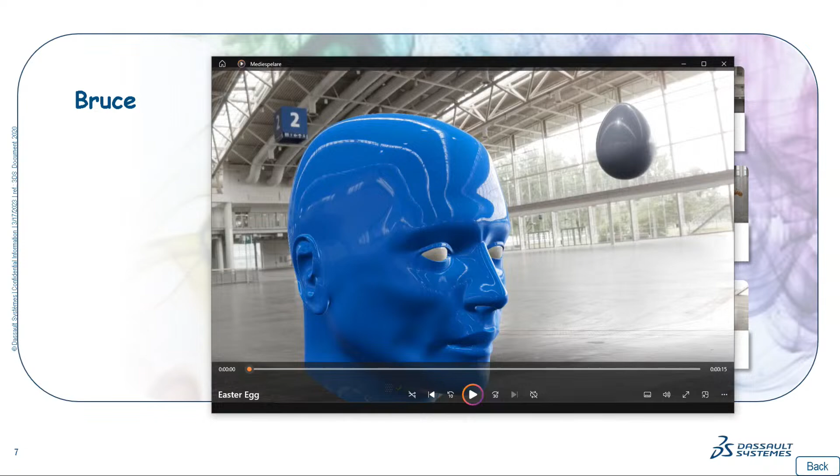So this is kind of a bit more slurry settings, a little bit higher viscosity, and it's binding the particles in a better way there. It's also exactly like how the albumin of the egg and the yolk will act, right? The little slurry will be all over your face. Yeah, it is actually an egg yolk in the middle.

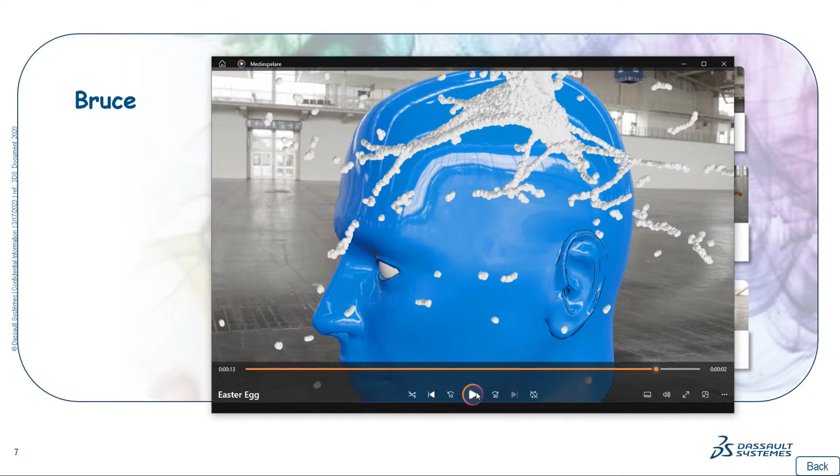I didn't change the colors, but I would like to do that, and probably more eggs coming to Bruce as well. Great, we can't wait. This is exciting, Bruce in the Easter egg fight.

This is great. Mattias, thank you so much for taking time out of your busy schedule. I have one more thing - my final words are that I think as a mechanical engineer, or engineer in general, simulation really brings you a superpower to your engineering work, because it's a tool to see through things. You get an X-ray vision.

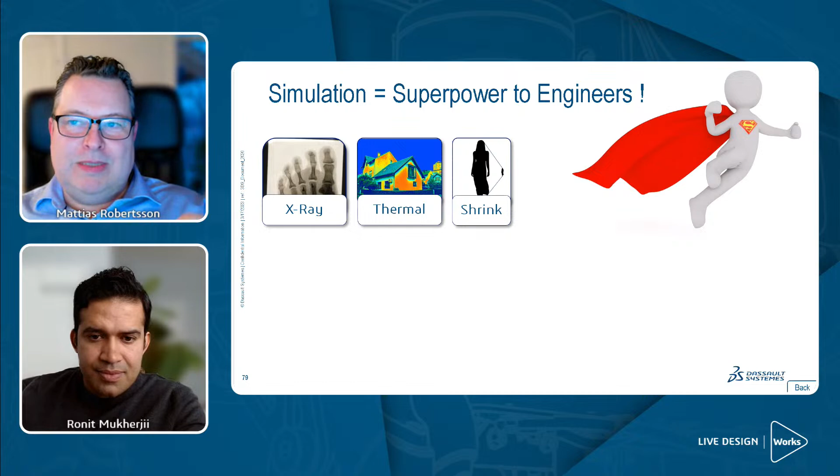You get a thermal vision as well to understand the temperature and temperature distribution. You can shrink yourself, as I say, you can go inside your design to really experience from inside and out. You can control wind, like wind tunnels, control fluids and understand those, and also control time. You can see things in slow motion, very rapid events. You can really slow down and really understand what's happening there.

And the big one is to predict the future. I mean, how much wouldn't you pay to predict your future? And with simulation, you can do that because you're virtual testing it, and it's a real money saver.

So I'm surprised that not more have invested in these superpowers, because this is simulation for me, and that's my final words. Thank you. This is a great point, and I think you bring a fantastic point as well, where simulation does bring superpower to engineers to make sure we are designing in the correct format, like we're going in the right direction without having to worry too much about it. So that itself, as peace of mind, it's important as a design engineer. So simulation does bring a lot.

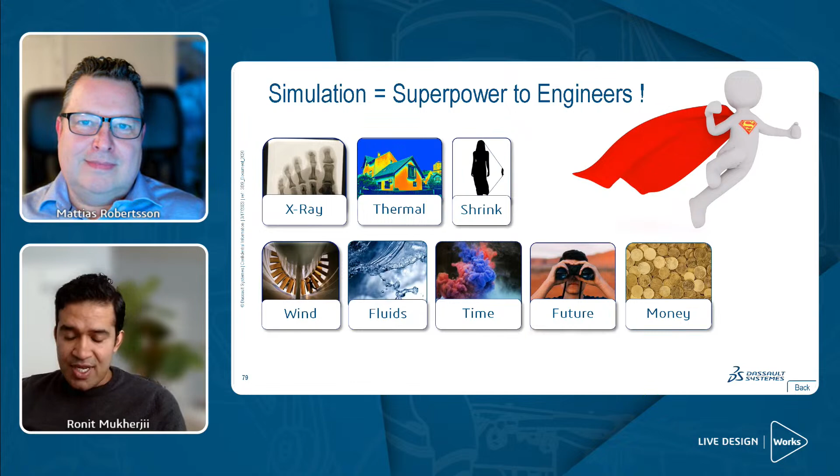And in the end, what it does is, of course, it's saving you cost and time and effort. That's what it boils down to: saving cost, time, and effort. So no, this is fantastic. And I think the more we talk about simulation with our users, with our viewers, the more we spread the gospel of it, the more people will know about it. So I think that's one of the reasons we're seeing quite a big influx of people adopting simulation now, and it's just going to continue to increase, because who doesn't want to have a superpower, right?